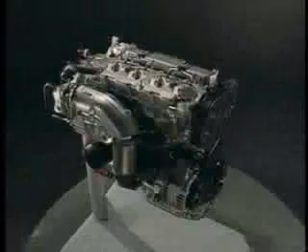The 1CD FTV is a 2-liter inline 4-cylinder DOHC 16-valve diesel engine with common rail injection system and turbocharger. The engine has adopted numerous cutting-edge technologies. Among them, this video describes the new diesel injection system, which has achieved high performance, clean emissions, low noise, and low vibration.

The common rail injection system accumulates the necessary pressure required for injection of fuel inside the rail. Just like the EFI system of the gasoline engine, this system injects fuel into the cylinders by opening and closing the injectors in accordance with the electrical signals output by the ECU. Therefore, this system can finely regulate the injection volume and timing, thus contributing to highly efficient operation and clean emissions. Furthermore, because this system accumulates constant fuel pressure in the rail, it does not create sudden pressure rises and offers the advantage of quieter operation.

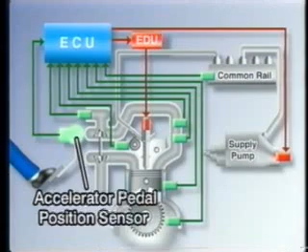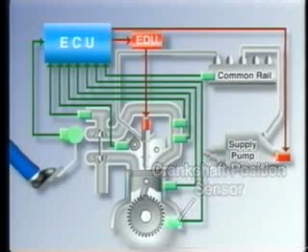Now, let's look at the system. Let's start with the sensors. Here's the accelerator pedal position sensor that detects the opening angle of the accelerator pedal. The airflow meter. The intake air temperature sensor. The turbo pressure sensor. The water temperature sensor. The crankshaft position sensor that detects the rotational angle of the crankshaft. The camshaft position sensor that identifies which cylinder is at TDC. And the fuel pressure sensor at the common rail, which detects the pressure inside the rail.

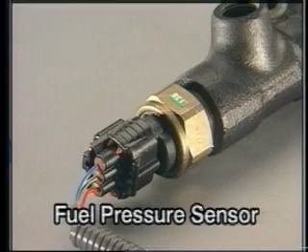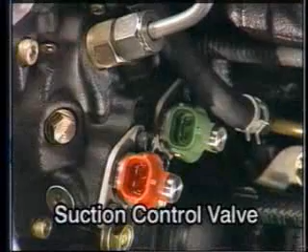Here are some of the actuators used in this system. The suction control valves, or SCVs, which are located on the supply pump assembly, control the amount of fuel that is fed to the supply pump. The electronic driver unit, or EDU, which boosts the injection signal from the ECU. And the injectors that inject fuel in accordance with the injection signal.

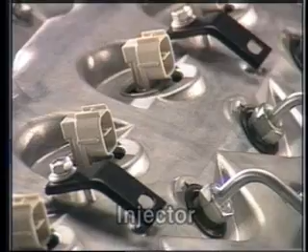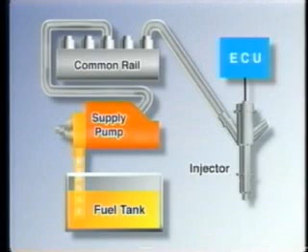The fuel is drawn up from the fuel tank by the feed pump located in the supply pump assembly. Then it passes through the fuel filter and is fed to the supply pump. The fuel becomes pressurized in the supply pump to reach the injection pressure. The pressurized fuel is fed into the common rail where it is accumulated. The fuel that accumulates in the common rail is distributed via the injection pipes to the injectors of the cylinders. Then the injection signal from the ECU opens the injectors to inject fuel.

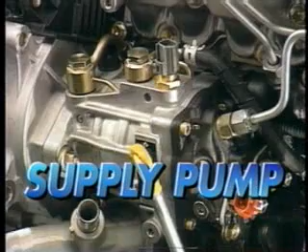The fuel pressure that is created in the supply pump varies according to driving conditions. It is approximately 20 megapascals at idle and increases to as much as 135 megapascals during high-load, high-speed operation.

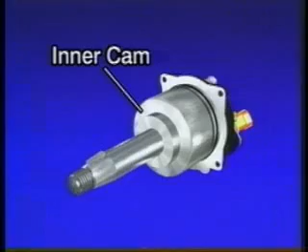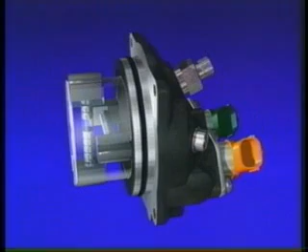Let's look at its internal construction. The supply pump contains an inner cam, which is driven by the engine. On the inside of the inner cam, there are 2 sets of opposing plungers. Each set of opposing plungers is positioned at a 90-degree angle from each other, and each plunger operates independently. The tip of each plunger is provided with rollers that come in contact with the inside of the inner cam. The inside of the inner cam is oval.

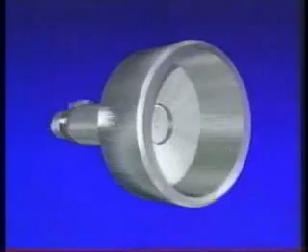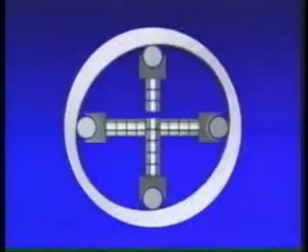The rotation of the inner cam pushes the plungers via the rollers, which effectively pumps the fuel. The use of the 2 opposing plungers in this manner minimizes the drive torque fluctuations, which makes for quieter operation.

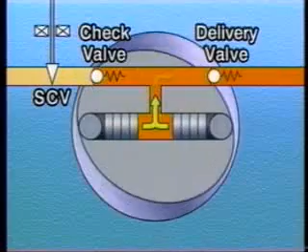The fuel that has been sent by the feed pump flows past the suction control valve, or SCV, and the check valve. The fuel is then pressurized by the plungers and flows via the delivery valve and is fed into the common rail.

The SCV regulates the volume of fuel that enters the supply pump plungers. During the suction stroke, the longer the SCV remains open, the greater the volume of fuel that enters the pump plungers. And because a large volume of fuel is pumped, the fuel pressure becomes high.

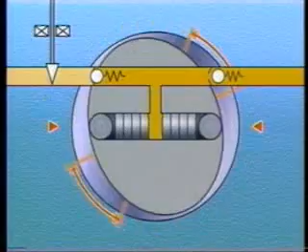During the suction stroke, the shorter the SCV remains open, the smaller the volume of fuel that enters the pump plungers. And because only a small volume of fuel is pumped, the fuel pressure becomes low. In this manner, the ECU controls the opening of the SCV so that an appropriate fuel pressure can be reached.

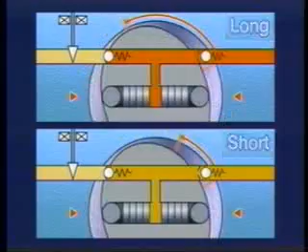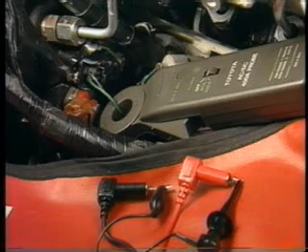Let's watch on an oscilloscope to see how the SCV is controlled. To easily monitor the operation of the SCV, let's see the electrical current that flows through the SCV. The SCV signal is shown at the top and the fuel pressure sensor signal at the bottom.

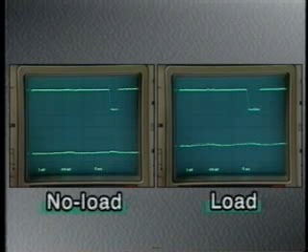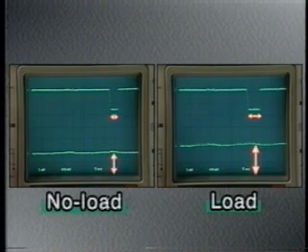Here's a comparison between the no-load condition at 1500 RPM and the load condition at 1500 RPM. It's evident that in the load condition, the SCV remains open longer and the pressure in the rail is higher. Thus, according to the signals received from the sensors, such as those of the accelerator pedal or the engine, the ECU controls the SCV in order to regulate the fuel pressure that is needed for the particular driving condition. Then, the resulting pressure is fed back to the ECU by the fuel pressure sensor in the rail.

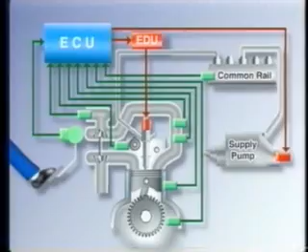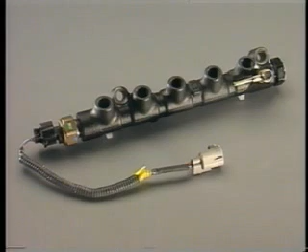The common rail accumulates the fuel that has been highly pressurized by the supply pump and distributes it via the injection pipes to the injectors of the cylinders. A fuel pressure sensor is provided at one end of the common rail to detect the fuel pressure in the rail and to send it as a signal to the ECU.

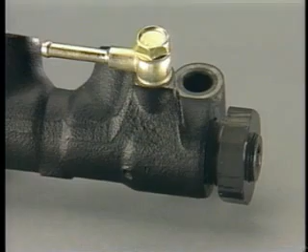A pressure limiter is provided at the other end, so that in the event of a system malfunction, if the fuel pressure rises abnormally, the pressure is relieved mechanically.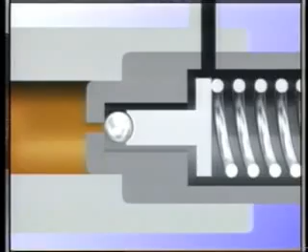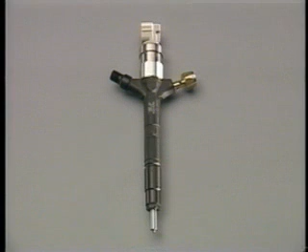On receiving the signal from the EDU, the injector opens its nozzle to inject the fuel that has been accumulated in the common rail. Let's look at its internal construction.

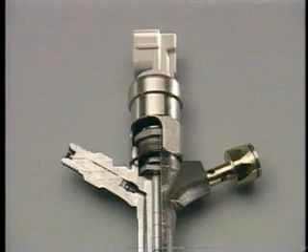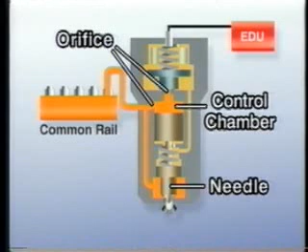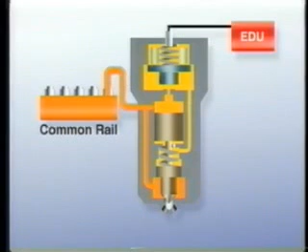The fuel that is fed from the common rail separately enters the control chamber and the nozzle portion of the injector. In this state, the nozzle is closed because of the pressure of the control chamber and the spring force pushes the needle down. Upon receiving the signal from the EDU, the solenoid valve above the control chamber opens. Then the pressure in the control chamber decreases, which causes the pressure at the nozzle to push the needle upward, and the nozzle opens to inject fuel.

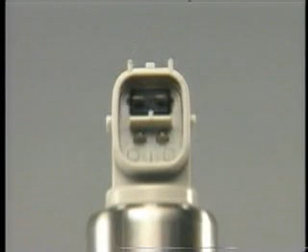A small trimming resistor is installed to each injector to compensate for production variations. The ECU recognizes the resistance and applies correction for injection of each cylinder.

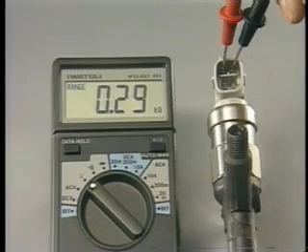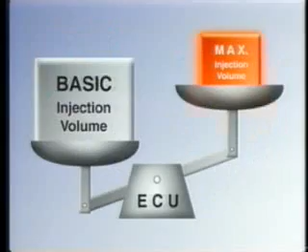How does the ECU determine the injection volume and timing? Let's first look at the injection volume. The ECU calculates the basic injection volume and the maximum injection volume, and whichever is smaller is determined to be the actual injection volume.

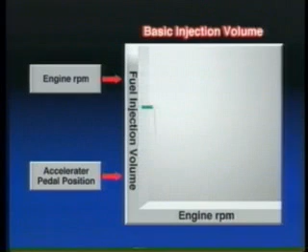The basic injection volume is calculated from the engine RPM signal and the accelerator pedal position signal. From these two signals, the injection volume that is required by the driver is calculated.

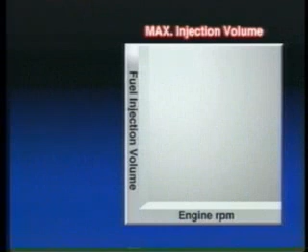On the other hand, the maximum injection volume is calculated based on the actual intake air volume and temperature that have been obtained from various sensors, such as the fuel temperature sensor, in addition to the engine RPM signal. Thus, a volume of fuel that can theoretically be burned completely is calculated.

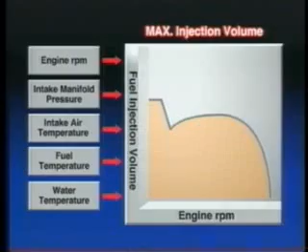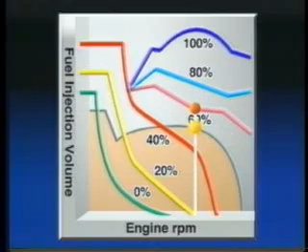These two calculated values are compared, and the ECU determines the smaller of the two to be the actual injection volume. In this manner, the ECU is always taking the actual intake air volume into consideration to determine an optimal injection volume that does not generate black smoke.

In particular, in the 1CD FTV engine, the changes in the intake air volume during the transient state is detected by the airflow meter in order to correct the injection volume.

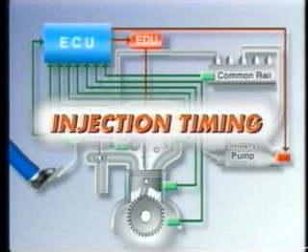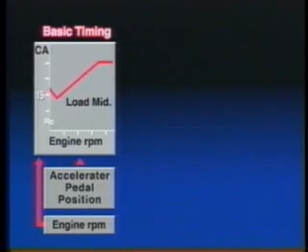Now, let's take a look at the injection timing. The injection timing is determined with the basic injection timing that is calculated based on the engine RPM signal and the accelerator pedal position signal, to which corrections are made.

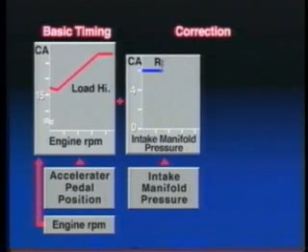Corrections are made for the intake manifold pressure signal and the water temperature sensor signal.

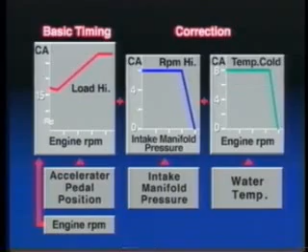Now, let's take a look at the pilot injection. A pilot injection is a small amount of fuel that is injected before the main injection. Accordingly, when the main injection starts, the fuel that was injected beforehand is already burning and serves to smoothly ignite the fuel of the main injection.

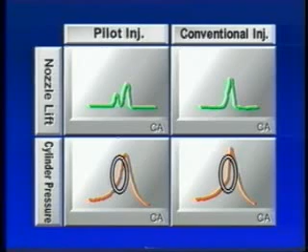As a result, a sudden rise in the cylinder pressure during the combustion stroke is restrained, thus enhancing the quieter operation of the engine.

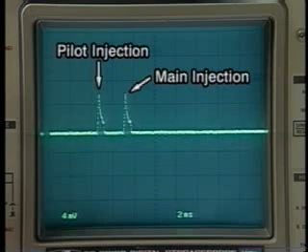Let's take a look at the actual injector signals on an oscilloscope. To easily monitor the operation here also, let's see the electrical current that flows through the injector. It is evident that the pilot injection takes place before the main injection.

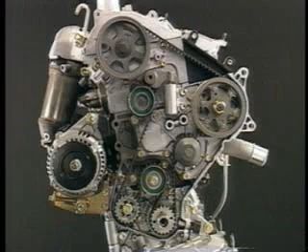To enable the ECU to correctly determine the rotation position of the supply pump, the marks on the pulleys must be aligned while installing the timing belt.

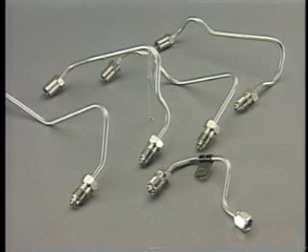The pressure of the fuel becomes extremely high in the common rail. Therefore, pay close attention when installing the unions of the injection pipes or the inlet pipes. If any operation that causes the contact of the union to change, such as the replacement of parts, make sure to replace the pipe. For details, refer to the repair manual.

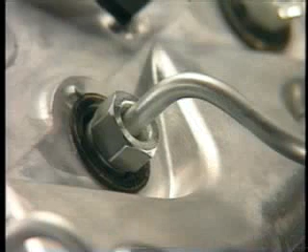After tightening a union, make sure to check for leaks with the fuel pressure raised. The fuel pressure can be raised by conducting an active test using a handheld tester.

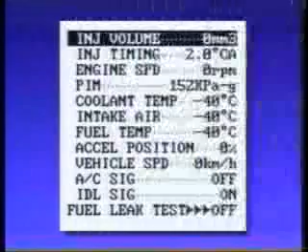In addition, one of the active tests that can be performed is the power balance test, in which the injection to the cylinders is cut off one cylinder at a time.

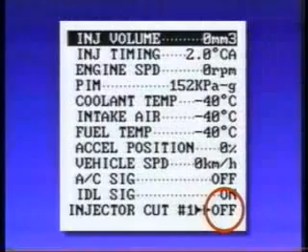The pressure limiter of the common rail has been precisely adjusted at the factory. Therefore, any adjustment or replacement in the field must never be done.

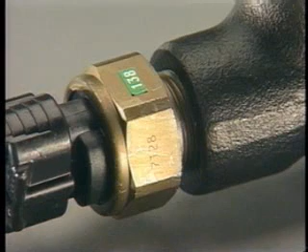During its installation, the fuel pressure sensor deforms through tightening in order to ensure proper sealing with the common rail. If the fuel pressure sensor or the common rail must be replaced, they must be replaced together on an assembly basis because reusing them causes fuel leaks.